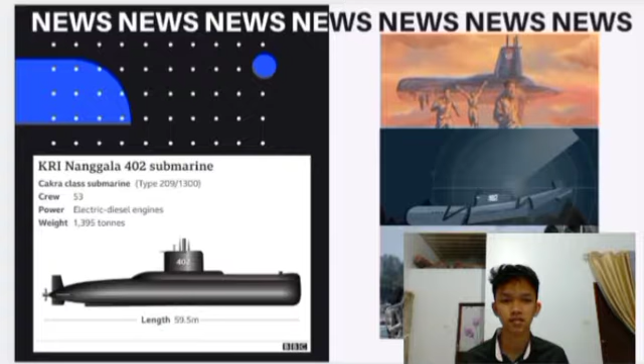We know that there are 53 personnel on board who have lost contact from the submarine KRI Nanggala 402. The Indonesian National Army has stated that the submarine sank in the Bali Sea. The submarine was on torpedo shooting practice at a depth of 13 meters. But 46 minutes after diving, the ship was detected at a depth of up to 850 meters below sea level. The last situation the crew faced was experiencing a blackout and internal waves.

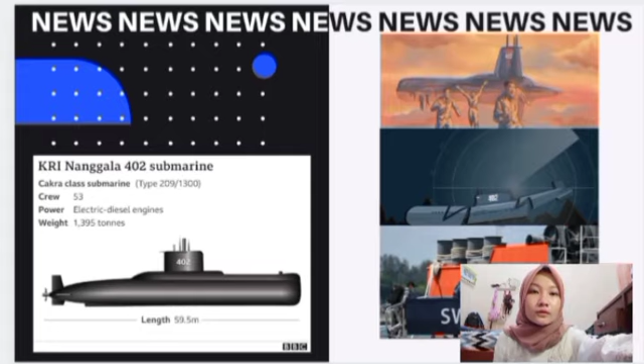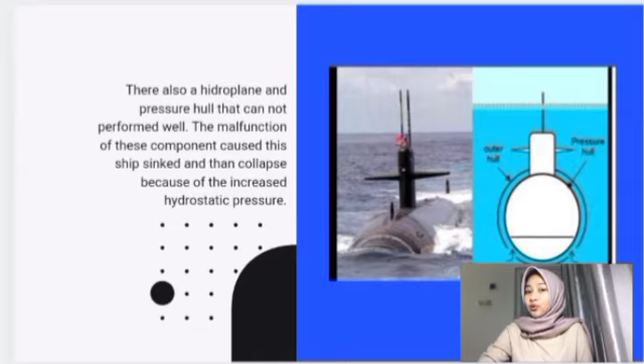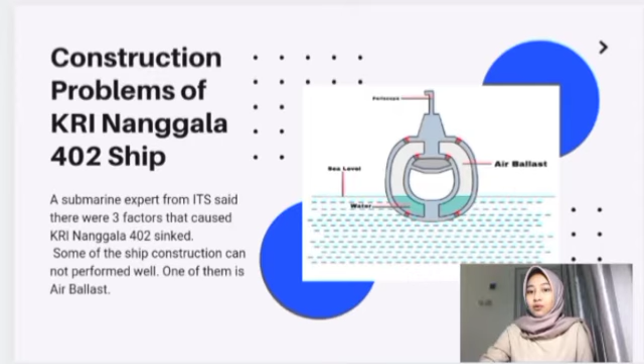Hey everyone, my name is Iva Syafia Ulairfan and now I would like to tell you about the construction problem of the KRI Nanggala 402 ship. A submarine expert from ITS said there were three factors that caused the ship to sink. Some of the construction design in this ship didn't work well. One of them is called air ballast, which functions to regulate the depth the ship can go. Not only that, there were also the hydroplane and pressure hull.

The malfunction of these components caused the ship's collapse because the hydrostatic pressure increases 4 times as the ship moved to the depth of 800 meters. By the way, the ship was built 40 years ago. That means the construction of the ship is not as sophisticated as newer ships. The submarine expert said that the ship can only go to a depth of around 300 meters, but they predict that the ship dove deeper than that.

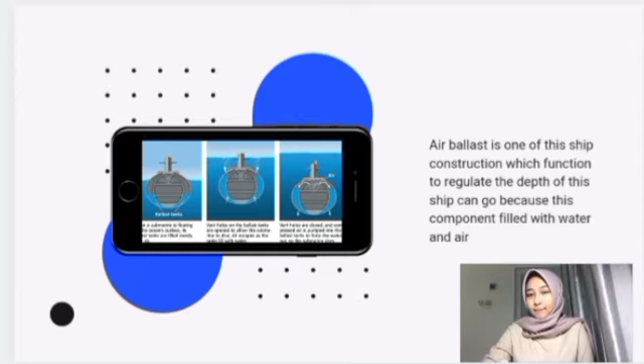Besides that, everyone agreed that the main factor was a natural disaster. It's called an internal solitary wave, which can drag objects vertically. The last problem is the black box was not found in the ship, so we cannot know the exact problem of the ship. So that's all from me. We can go to the next topic.

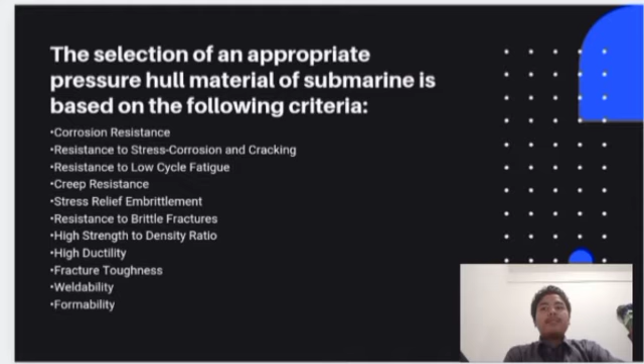Thank you. Okay, so my name is Muhammad Afanur Rahman Hadi with the NRP number 500-720-1192. Right now I'm gonna explain to you about the materials of submarines. The selection of an appropriate pressure hull material for a submarine is based on the following criteria: corrosion resistance, resistance to stress corrosion and cracking, resistance to low cycle fatigue, creep resistance, stress relief embrittlement, resistance to brittle fractures, high strength to density ratio, high ductility, fracture toughness, weldability, and formability.

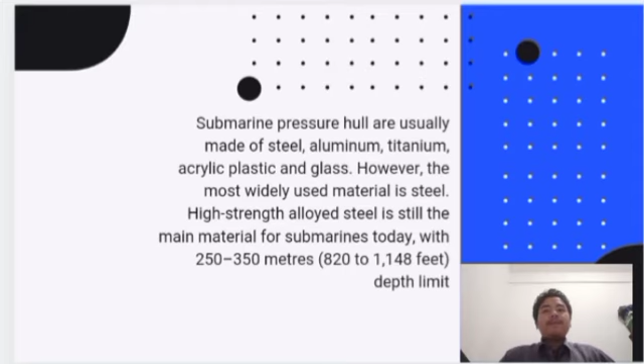Submarine pressure hulls are usually made of steel, aluminum, titanium, acrylic plastic, and glass. However, the most widely used material is steel because of the high degree of knowledge available to designers and manufacturers, as well as its outstanding performance in the ocean. High-strength alloy steel is still the main material for submarines today, with a 250 to 350 meters depth limit.

Hello everyone, my name is Julio, and right now I want to give you an explanation about things that we need to consider in building a good and safe submarine. The first one is we need to consider submersion and trimming. To submerge hydrostatically, a ship must have negative buoyancy, either by increasing its own weight or decreasing its displacement of water, so we need to trim it. Then we have the hull. In designing a submarine, we need to determine the hull shape, for example the cigar shape, teardrop shape, and so on. This type of hull is important because it affects the drag, buoyancy, thrust, and any other force.

The third one is propulsion. In gaining thrust for a submarine, we need to consider the size of the propulsion. How many blades do we use? What motor do we use? Etc. And then we have sensors. There are many kinds of sensors that we use in submarines, such as temperature sensors, pressure sensors, distance, and many other things. And then navigation and communication. To have good navigation and communication, we have to consider proper systems that could catch a sufficient wave signal so that the submarine doesn't lose communication with people above the surface.

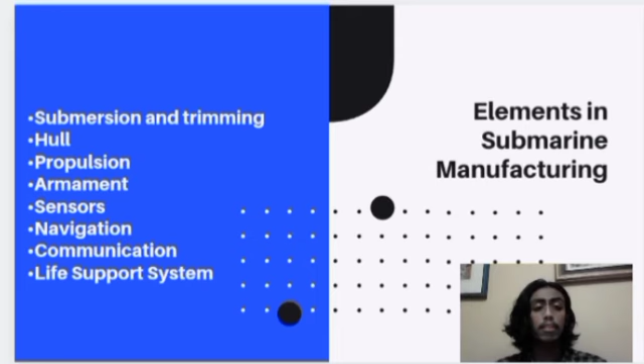And the last one is the life support system. Life support means the power that carries the submarine. These days, many people use nuclear power due to its efficiency and being environmentally friendly. Thank you, that is all from me.

Now, I will tell you the role of the mechanical engineer in submarine manufacture. A mechanical engineer has an important role in submarine manufacture. As we know, the first stage in submarine manufacturing is submarine design. In this stage, the submarine must be designed according to its mission. The submarine is one of the most complex vehicles in the world, so it requires high precision in design. In this stage, scientists and engineers discuss with each other to determine the best submarine design. But of course, the design must consider various aspects like structure, propulsion, boat control, communication, etc.

After getting the best design, a mechanical engineer must determine the best material for the submarine. The engineer must test the resistance of materials, such as with tensile tests and compressive tests. After that is the stage of making the submarine. At this stage, a mechanical engineer still plays an important role, such as cutting, shaping, combining, and welding parts of the submarine until the submarine is ready to sail. But it doesn't stop here, and engineers will forever be needed for the maintenance of the submarine. Thus, with good mechanical engineers, the submarine will likely not experience significant trouble, improving the safety of the submarine crew.